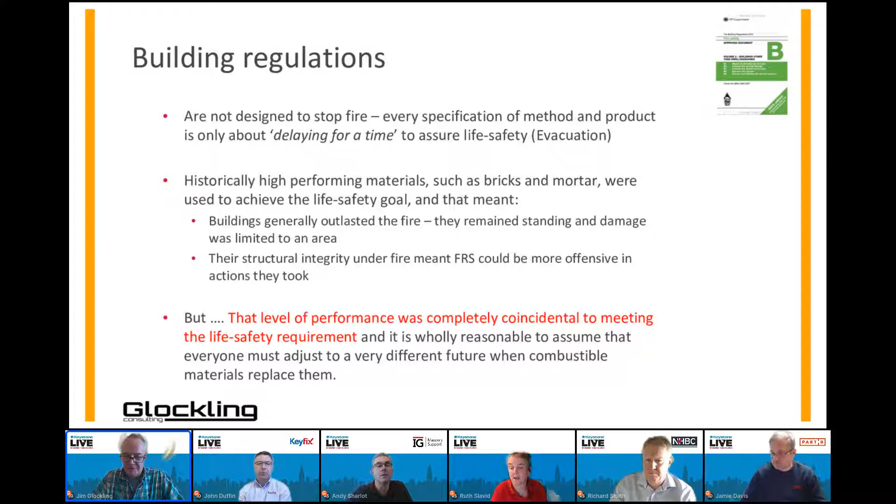So we need to bear in mind that the level of performance that we've come to expect was actually just completely coincidental to meeting a life safety requirement by the use of high-performing materials. And as we move to a situation where we might see more building in wood, and as we are, we may see building performance being very different indeed.

So now let's have a little look at the client's perspective on things. The CEO of any company has a duty to make profit, not harm their workers, and also to act in the long-term interests of any business. And really that brings in the idea of resilience across all areas of the business. And how buildings perform can play a very major role in that. But they also have other constraints as well, and things that they would like to pursue, such as sustainability and to be seen to be a good company.

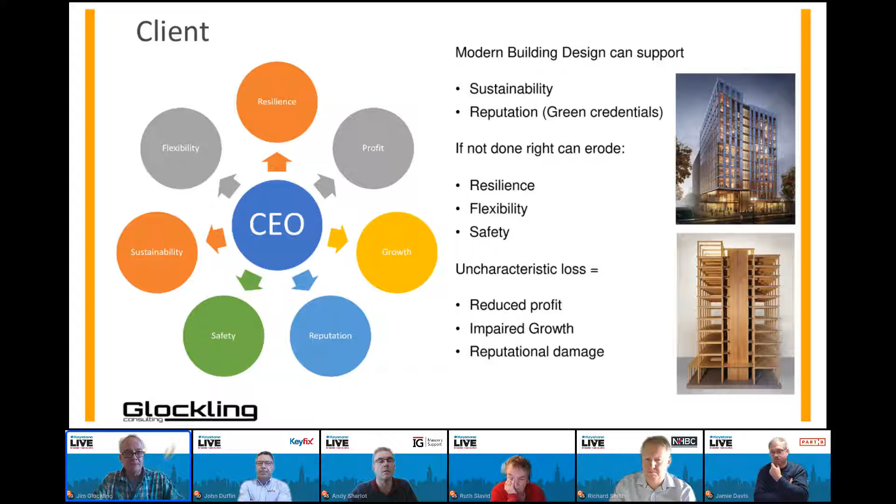Now, modern building designs, many involving large quantities of combustible materials, can certainly meet sustainability requirements and improve reputation. But if they're not done right, it can erode resilience, flexibility, and safety. And obviously, uncharacteristic loss can lead to reduced profit, growth, and reputational damage. Now, the way that businesses normally address this is through the creation of a business continuity plan. And this is an opportunity where you can set voluntary objectives over and above compliance.

So rather than specifying that fire should not break out of a compartment for 60 minutes, maybe you say, actually, the fire is just not allowed to spread at all from that compartment. So you essentially make that time infinity. And you would use materials and suppression systems to meet that objective. You can actually get quite holistic and say, let's make sure we never exceed the critical business damage threshold for the business, however that's specified.

And really, the performance-based engineering approaches we have are absolutely applicable to design to that, rather than just ensuring evacuation before collapse. It's just a different measure that you set to achieve. And really, the role of non-combustible materials in the three parts of business resilience is really susceptibility. They can reduce the susceptibility of a fire starting, because you can't light them. They can reduce vulnerability once a fire has started, and that fire will spread less far, and obviously improve recoverability once the fire's out, because hopefully less has been damaged.

Now, business continuity planning is really planning for the unexpected. It's an extension of scope from what compliance might deal with, and also your credible worst case scenarios might be different as well. There's a question of how far you go, how deep your pockets are. Obviously, we'll remember in the 1970s that dreadful televised event of a giant kitten knocking over the Post Office Tower. Really, that's an event where critical infrastructure gets damaged, but highly unlikely. I'm sure there are more reasonable things to deal with.

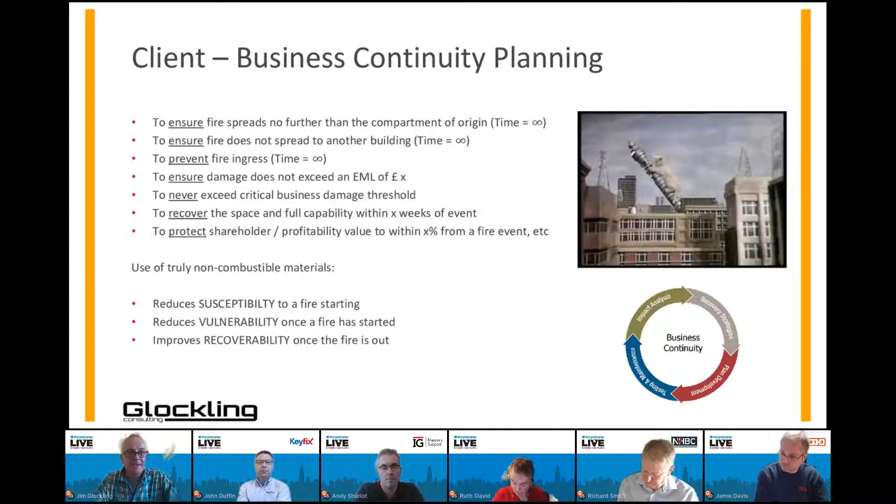But this is how the client would normally deal with enhancing the resilience of their business, through adopting voluntary objectives for how the building might perform in fire, flood, and escape of water events over and above that low bar that compliance sets. Now, if we have a look at the insurer, they have a key figure called estimated maximum loss. They need to have a good idea of how a building is going to perform in fire.

Now, in a traditional multi-story building, you might lose the fire floor, the floor below to water damage, and the floor above to smoke damage. And so they would be assuming that maybe out of a 17-story building, you lose 4 floors, and they give insurance on that basis, which is obviously a lot cheaper than assuming the whole building gets burnt down. But as we move to use of combustible materials, that can become a very difficult equation to balance. Really inherent in that is the use of concrete floors, and we see modular construction designs come in which actually don't even have a floor plate.

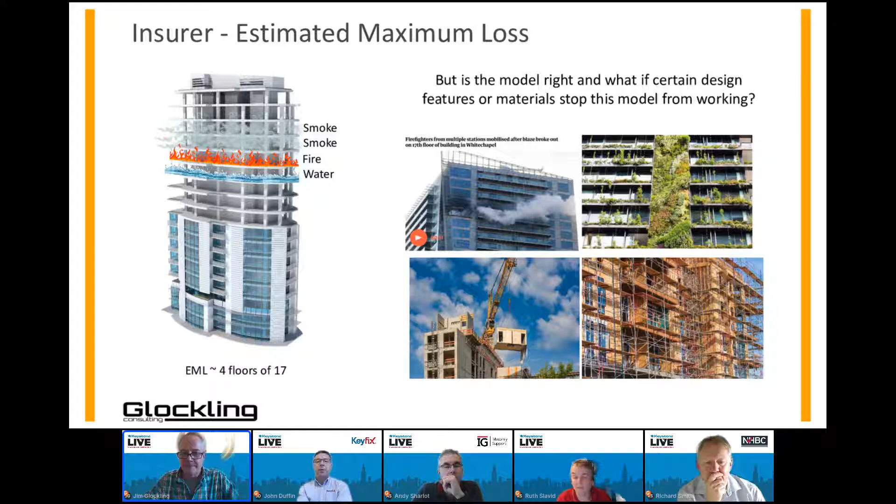We see increasing use of, obviously, timber structures, green walling, all these things which can promote fire spread over the outside of the building, and really by some methods, combustible voids spread fire within buildings as well. So that's really the way they deal with things.

And also, it's not just about the individual building as well. It's spread between buildings also, which brings in the issue of combustible claddings as well, and proximity. So there's the sort of three players at play.

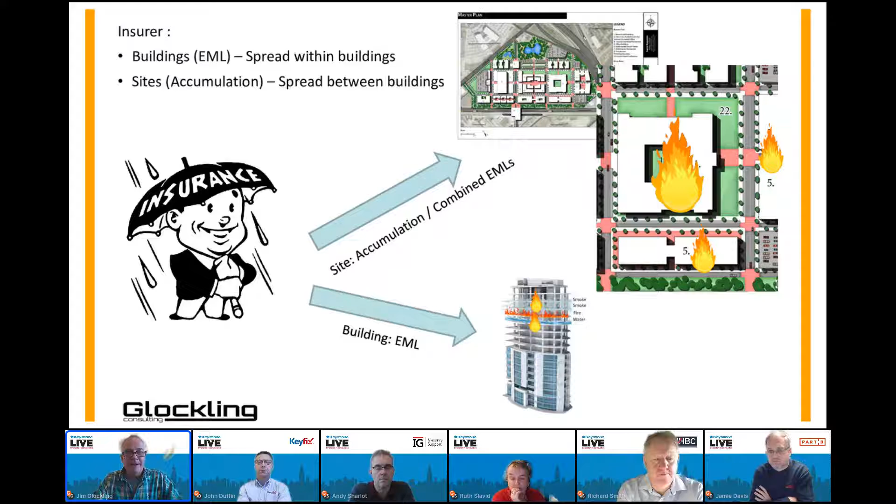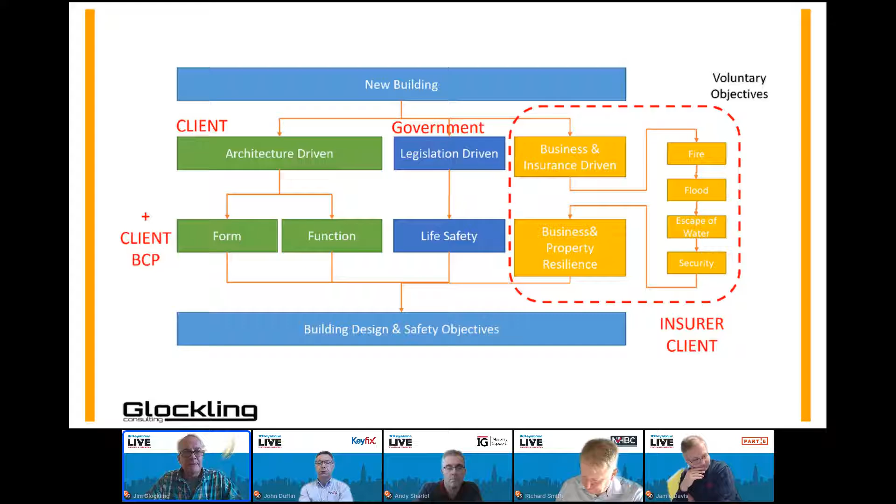And I guess in a utopian world, when you're setting the design for any building, you'd consider all these three elements: the architecture-driven, the form and function of the building, what it has to do; the legislation-driven properties for life safety; and then the business and insurance-driven merits of the building to protect against fire, flood, escape of water, security, social unrest, what have you. Anything you might think your building needs protecting against where it is, to actually come out with a building design and safety objective.

So it's quite a utopian view, but we're working on mechanisms and really enhanced guidance to support this, where you might have a building where in the design period good consultation takes place. So yes, it meets the compliance requirements, but we know that to be a very low bar, which doesn't guarantee that your building and business don't end up trashed at the end of it, but everyone is safe.

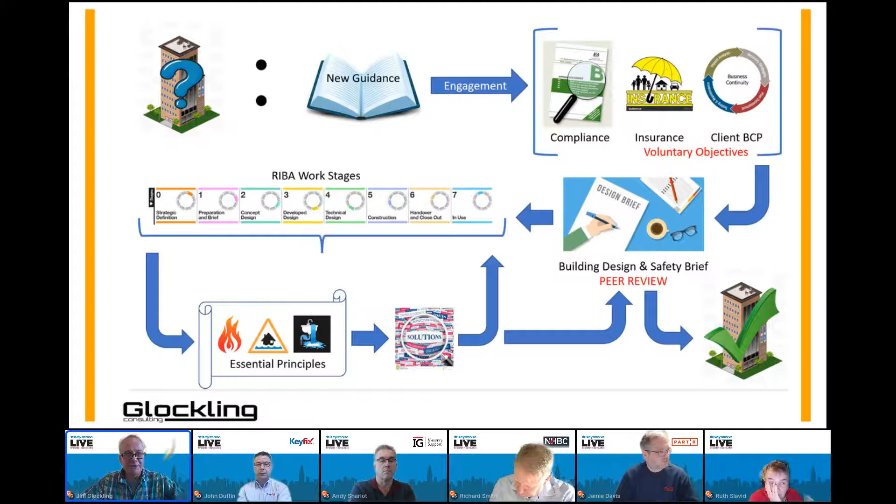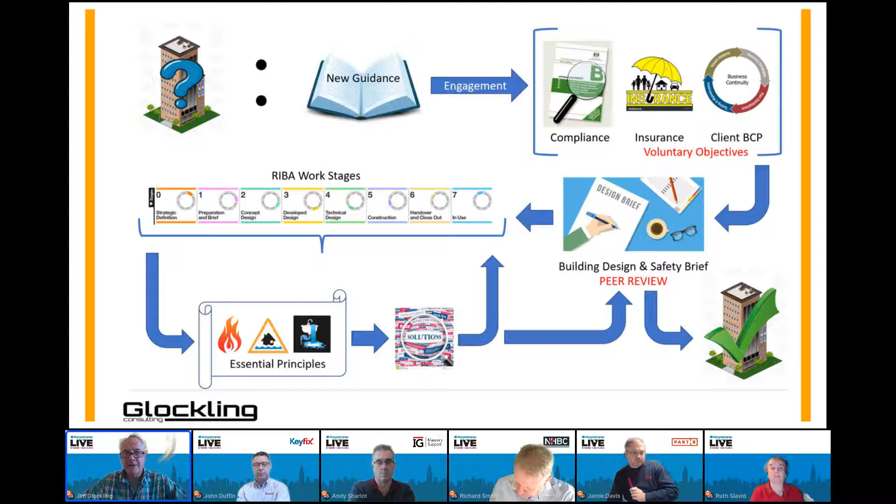But proper consultation with the client to support their resilience and sustainability objectives, and with the insurer to introduce these voluntary objectives, which the designer can work to using the normal toolkit of parts that they have. And there's a lot of guidance out there to assist as well. Certainly, from an insurance perspective, there are the essential principles for the protection or enhancement of fire, flood, and escape of water protection, until you come out with a satisfactory solution that really is appropriate to all stakeholders.

I just wanted to close off really by saying that it's inevitable that we're having a future with more combustible materials, certainly a lot more wood in the construction of buildings. But I see the use of non-combustible materials as the enabler for this to actually happen. And that is where you use non-combustible materials where they can make up any shortfall, and where they need to be, where really just wood can't do it.

And certainly designers are responding with hybrid building designs at the moment, which represent a very significant contribution to carbon reduction, and yet are ensuring the structural integrity of the building under fire, so that they become insurable, and for the fire and rescue services, they stay sound for them to do their job.

I don't think this change has been appreciated by government yet. And at the moment, the insurer for some breeds of building is becoming the de facto regulator, which is not a role that they should be holding, or that they would want. And really more action is required. So we do need some new guidance, which actually does bring resilience into the equation.

Otherwise, we may be facing a new normal where more buildings do end up on the ground, maybe even where multiple buildings become involved in fire. And of course, if we damage the reputation, as cladding's reputation has been damaged, we could end up with a whole breed of buildings that we need that basically loses its reputation and becomes disgraced, leading to a stagnation of innovation in construction. And of course, there can also be possible safety issues with this as well. So that's all I have to say.

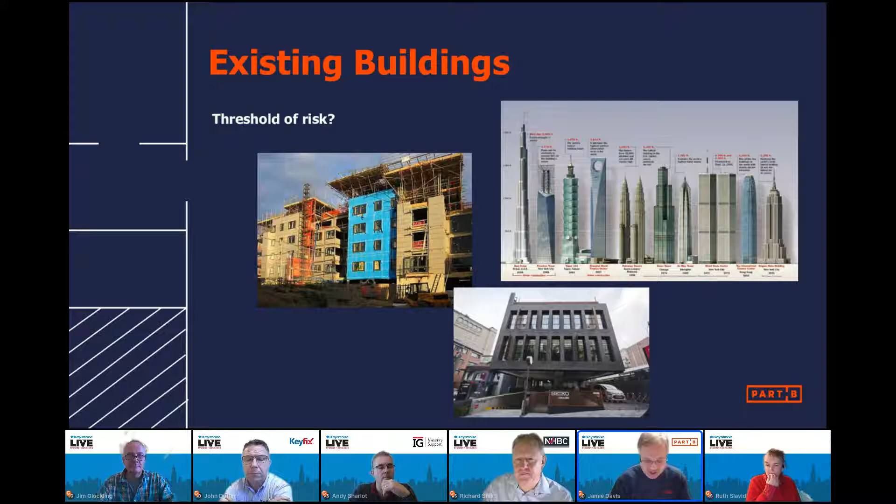That's fine where we've got a building which is lines on paper and we're designing from scratch. However, as we know, that isn't the reality of the system. We know full well that there are many buildings out there which don't comply with current standards, and people may be putting reports out there saying, actually, no, we need to rip it all off. But the key question I would ask as a fire engineer is: is that proportionate to the risk?

So what are the options available in reality with these existing buildings when we think about the use of non-combustible materials? Well, of course, the easy answer, as many people do if there's any doubt, is rip it all off and start again. So full replacement of materials with non-combustible, so it complies. And that would arguably be the safest approach, but I appreciate from a fire engineering perspective there are also other matters that have got to be considered, which many colleagues from building control could iterate further on.

This is why I'm particularly interested in some of the work Jim's doing, because there are systems out there utilising non-combustible materials to mitigate the risk of combustible materials. Okay, it might not comply fully with the requirements of the building regulations, but when we consider the incumbent fire safety legislation, which is the requirement for existing buildings, does it bring that risk to an acceptable level? Of course, that's up for debate and will vary from building to building.

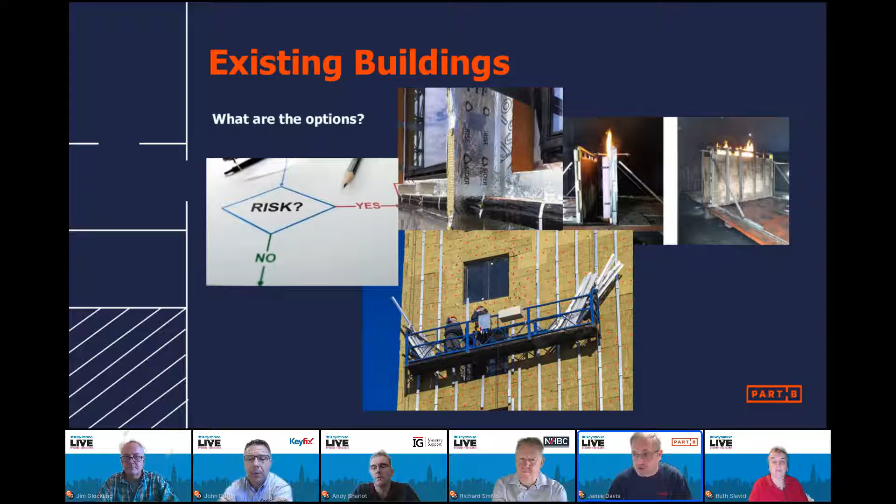But what is the reality of that, though? What are we finding? Even with new build non-combustible materials, and I'll talk through a very brief case study on this, we're still finding workmanship and design issues in what should be, as we've just spoken about, a very simple world of designing with non-combustible materials. But the reality is that isn't the case.

So a very recent job up in the north of the country, we were brought in to assist with the reclad of a building in fully non-combustible materials. Should be very, very simple from our point of view, and probably everyone would agree with that. Apart from they didn't really involve us in the design early enough, and they went ahead and built it. And the fact is they had an open cavity, which was 800 millimeters in depth for the full height of the building of 25 meters.

So real basics that we would all consider. We'd look at it and think, how did you possibly miss that? Yet they did. So in reality, people were still getting this stuff wrong, even with the most basic of designs. From our experience, I would say there's roughly a 50-50 split in workmanship and design issues, from maybe the architectural aspect all the way to contractors fitting on site. People may have different experiences to us, but I'd say it's about a 50-50 of what we're seeing.

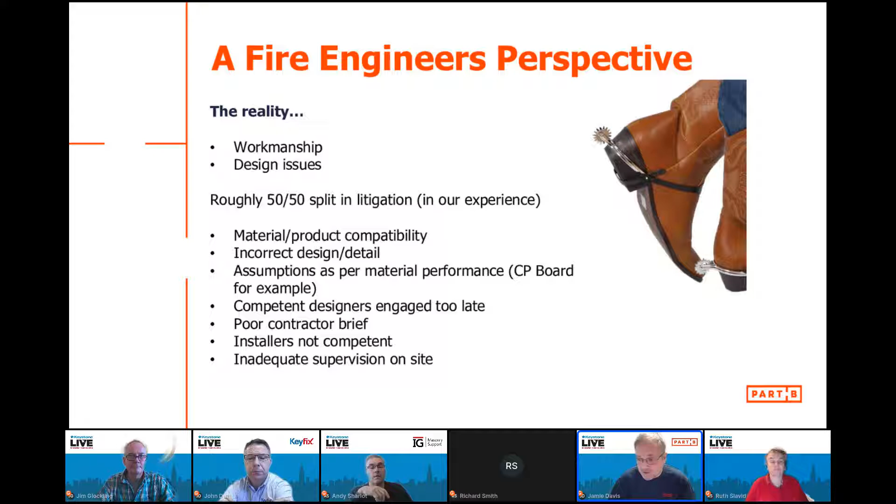But the repeating thing we're seeing again and again, particularly with any claim case, is that people are engaged too late and they're not being adequately supervised. They are the key things we are seeing. So how do we take this forward? I'm sure in many projects fire engineers are seen as an unnecessary expense, and you don't necessarily need a fire engineer on a non-combustible design. But we would certainly recommend that a competent designer is engaged ASAP, so we don't have the problem we had up north, where a full design is cracked on and they haven't included cavity barriers. I mean, how on earth do you miss that?

Incredible. A key thing as well is don't just rely on assertions in product literature and BBA certificates. This came to the fore in the recent case, which I'm sure you're aware of, Martlet versus Mulalley, where it says clearly that there shouldn't have been reliance on the BBA certificate in isolation. I know that case quite well; I was involved in the early stages. The architects or the contractors effectively relied solely on the BBA certificate, amongst other things, for saying the product was suitable. Do a little bit more digging. That's what we would want to do as fire engineers, and I'm sure many of you do. Be robust with asking for test certificates, test procedures, and importantly, seeing how those materials have been used.

Third-party review of designs, we welcome. Absolutely welcome. Many of our clients say we want a third-party review. We do third-party reviews of other fire engineering companies, and we would hope other clients do that as well. In this day and age, we're not precious, and I hope none of you are about throwing a design to another company to pick holes in it. I'd rather get it right. We all make mistakes; we're all human. The regular site inspection we all know about, that's been going on for years, but I would certainly be passing information back to the original designer, the fire engineers, or the competent designer to make sure they're happy with that.

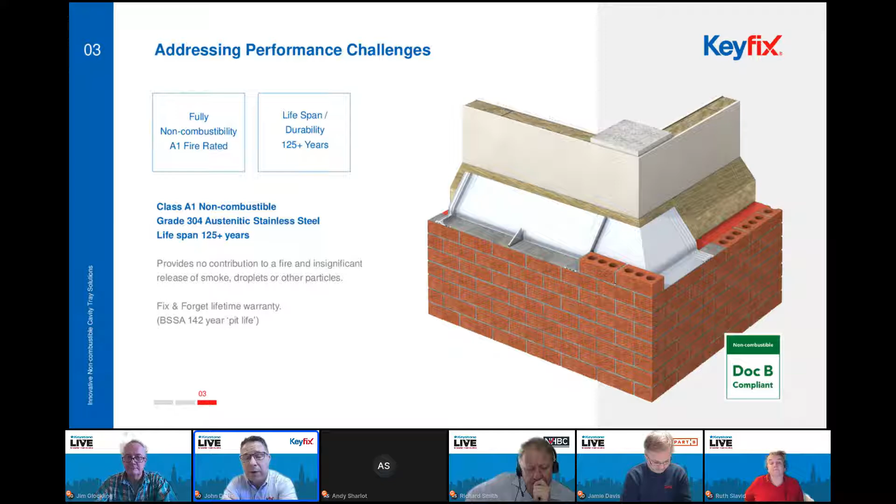And of course, the lifespan, as I said earlier, when we put these cavity trays inside a facade of a building that's going to last hundreds of years, we need to make sure that the material we use lasts that length of time. And the thinnest piece of material that we use is 0.5 mil thick stainless steel. And the British Stainless Steel Association gives us, in a semi-industrial environment, 140 odd plus years of pit life corrosion. And because these are built inside buildings and inside a cavity wall, they don't even get that level of exposure. So well and truly ticked all those boxes.

Water tightness. The one thing when we sat down with both the NHBC and BBA was the water tightness of a building. If you use a traditional cavity tray and you run it right around a building and you have water coming in one area, it can track along on top of a DPC or a cavity tray until it finds a joint or a gap and leak in. But it leaves it very hard to find out where that water is actually coming in the first place.

So we decided that we'd make the trays in modular lengths. The longest module we make is 10 bricks long, but at the end of each module, we formed integral stop ends on the tray, and we formed that out of the technology we used in our roof window flashings by draw forming. We draw form the stop ends on either end of the cavity tray, and it makes it very robust. It means any water that lands on top of that cavity tray can only travel a maximum of 10 bricks long before it meets a physical stainless steel one-piece stop end. There's no joint for it to leak through, and water drains out through the weeps.

Then, of course, introducing a metal product that's fixed to the inside leaf and built into the outside leaf would cause issues with cold bridging, and it would cause issues with differential movement. But because we formed those stop ends on the end of our trays, it made the tray very, very rigid, and it meant that the tray is self-supporting.

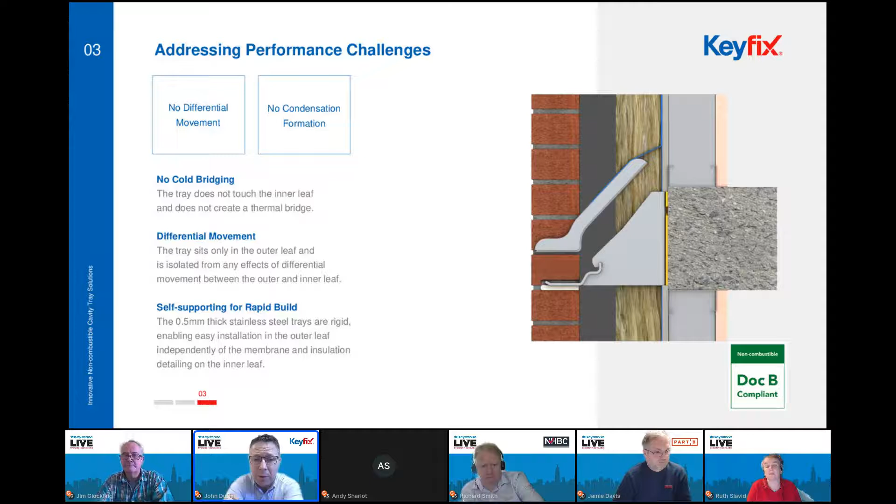And because it's only built into the external skin and not fixed to the internal skin, we have no issue with differential movement. The external skin can expand and contract with the weather, and the internal skin we hope isn't moving. So we don't have any issues.

And to back that up, we did a BRE study. So we asked the BRE to take all the A1 rated cavity trays, the non-combustible cavity trays that were in the market, and we asked them to run thermal modeling on how much heat transfer there is at each floor, because each of these cavity trays go round above the fire barriers at each floor, and it's quite a significant amount of it in the buildings.

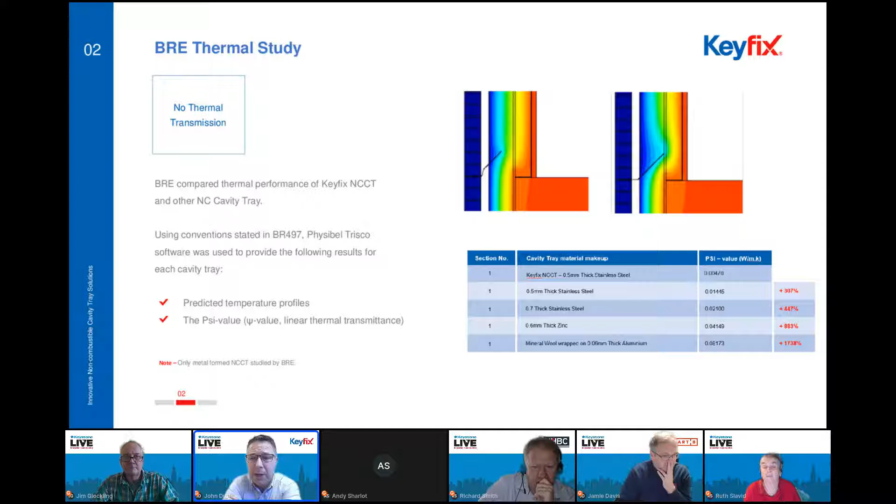And our nearest competitor was 3 times worse. So the psi value calculated with the system, our next nearest competitor was 3 times worse than we are. So by not touching the internal skin, we have solved one of the biggest problems, especially by using stainless steel. Other systems use aluminium and different things that conduct heat even more. So we were able to tick that box and solve that problem.

And of course, then the slip plane that I mentioned earlier on, a big concern in the very early days, by introducing a sheet of steel within the masonry joint. But in the Keystone group, we've been lucky that we've been indenting the internal flanges of lintels to form a plaster key, and because of that plaster key, the mortar below the tray embeds up into the key, and the mortar above it embeds around it, and we can get continuity of the brickwork bond and solve that problem.

And as I mentioned earlier on, and as Richard mentioned earlier about the systems and making sure that we develop systems for these products, all our cavity trays go out with preformed corners. No one has to cut, form, or make anything on site, including our stop ends at reveals or anywhere else. Those are all pre-made in the factory.

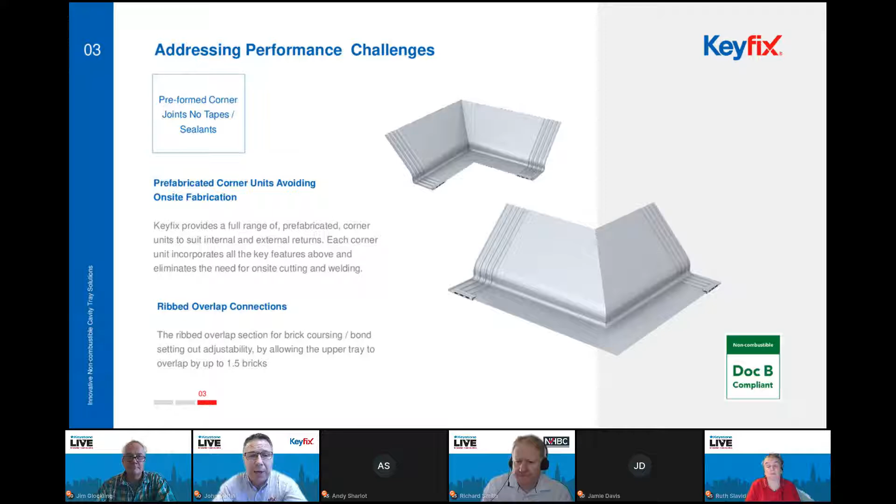But by introducing those little ribs that you can see on the image on the slide, those little ribs break the capillary action, and the water will seep through and then drop into the little rib and weep out through the front of the tray. And it means that we don't use any tapes or mastics.

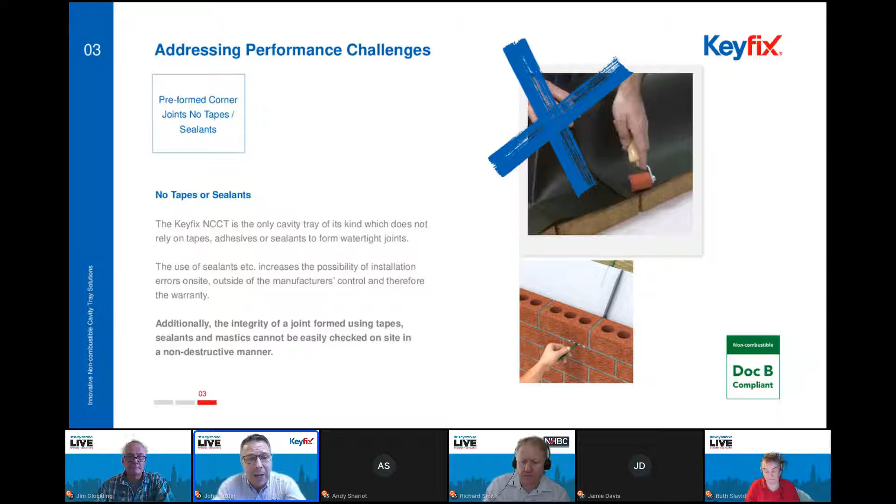And it was mentioned to us in one of the very first meetings we had that the single biggest reason for reopening a cavity wall of a building after the building's been occupied was down to joints in DPCs and cavity trays using tapes and mastics. So we were able to eliminate that by introducing the little ribs at the joints.

And what that does do is that it also gives us a non-destructive test. If you put 2 pieces of stainless steel together and mastic them together, how do you know the joint's good? You don't know. You pull it apart and you go, oh yeah, the joint was good. But we have developed a system where you can check that joint by non-destructive means and check that it's clear from any mortars or debris.

And if it is, then the joint weeps all day, every day. And as the very last point, in the top 9 areas or performance areas that we were asked to address, we do provide full markups. We do a full take off of all the components, and we give the bricklayers a full set of drawings that details part by part right our way around the building.

It's like paint by numbers, so that part A goes there, part B locks into it, and they go right around the building. And we do full toolbox talks. We turn up and we talk the guys through it on site at the very start, because it is a massive education piece. When you launch a new product and you bring something new to an industry that is generally slow to move, you have to invest heavily in the education part to make sure that what you've designed and what you've gone to all the bother to make and draw up, that is installed exactly as it should be.

And that brings us to the end. So this is my favorite slide always. The Keystone Group, we are known as innovators. Innovation never sleeps. We do sit down and we do listen to everyone, and that's how we've come up with all the innovations that we have and the products we have. And hopefully from the previous 10 or 12 slides, I've been able to demonstrate that when the industry is challenged with something to develop and make something new or better, that it doesn't necessarily have to cause huge issues for everyone to develop them.

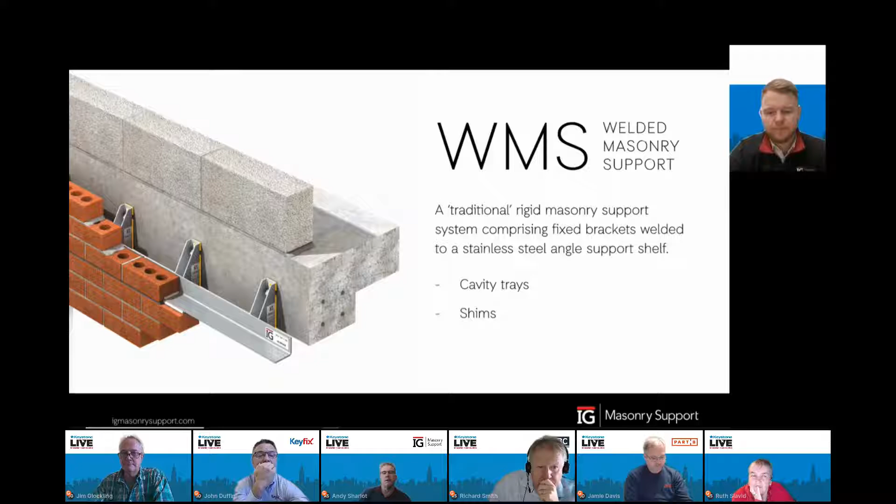We also have a range of prefabricated brick slip products to help architects and contractors achieve intricate brick features on facades. Our BOSS, or Brick on Soffit system, has been through quite the life cycle since its launch in 2015, mainly to improve the performance and sustainability of the products, but more importantly, ensuring we're ahead of the curve in terms of complying with regulations. Our original BOSS is a patented brick slip system where the bricks are bonded to a perforated steel carrier, which is fixed using a cast-in channel placed through the top of the unit.

When the changes came into force, the first response from IGMS was BOSS Plus, which incorporated a change in the adhesive and the addition of a mechanical fix of the bricks to the unit. The system was designed to meet approved document Part B. Superseding BOSS Plus, we then launched our BOSS A1. This is the most advanced system to date. It is a carbon neutral product with mechanically fixed brick slips, fully BBA approved, and most importantly, it is manufactured completely from A1 fire rated materials and is document B fire safety compliant.

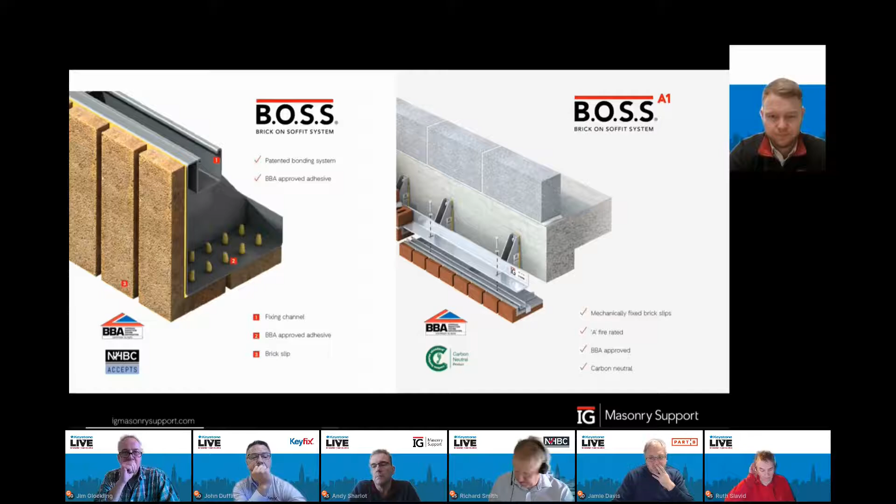To bring the topic of non-combustibility to life, I'd like to bring your attention to one of our recently completed projects, Southmere Village. The Southmere housing development is being built as part of a regeneration project designed to revitalise the Harrow Manor Way area of South East London. IG Masonry Support supplied products to buildings C1, C4 and C5, totalling 9 blocks. The entire development is valued at £126 million, and IG Masonry Support's product package for this development is the largest the company has supplied to a project since its inception.

The introduction of new building regulations set out by approved document B meant the brickwork contractor, Landmark Brickwork, needed to find products which met the conditions. IG Masonry Support's BOSS Plus met these standards, making us an ideal choice for a supplier.

The final question that is asked of us within this webinar is how we ensure quality and competence on site. As mentioned at the beginning of the presentation, IG Masonry Support and Keyfix work collaboratively to ensure we coordinate our products appropriately in any projects that we've both been specified for. This gives our customers peace of mind that due diligence has been done and any potential clash points are identified early and adaptations are made.